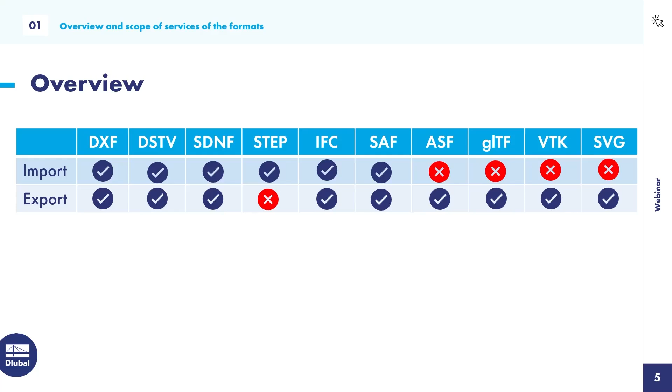We will start with the DXF interface and a brief overview of the import and export possibilities. Concerning the import, we mainly support the import of nodes and lines.

You can also import members from the DXF format. To do so, you have to mention the cross-section and optionally the material name inside the layer, and then we can read this information and automatically create members.

We can also import surfaces from AutoCAD, however only if the object is a 3D face element.

Concerning the export capabilities, here we mainly export nodes and lines. So members with the graphical rendering in Rfem will be exported as a simple line, not as a 3D rendered object.

One more information regarding the import. There are two options: we can import the DXF information directly, so you get the lines and nodes and so on, or you import a DXF as a background layer. That is of course also possible.

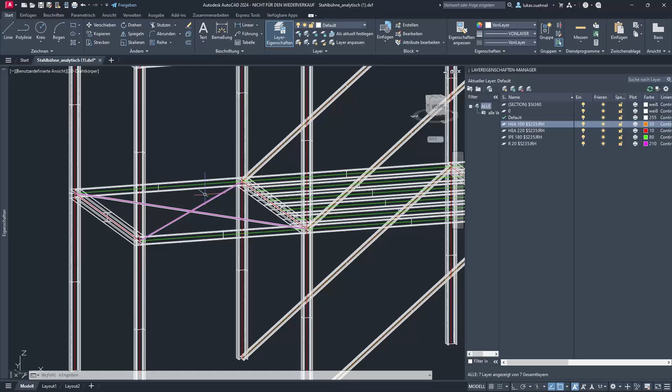Then I can go into Rfem 6, go to File, Import, and use DXF2.

I can select the DXF file, and then I will get a little dialog that allows me to define additional settings.

First of all, I want to rotate the structure because otherwise it would be upside down due to the global coordinate system. I want to generate the members based on the layer names.

I also want to import only selected layers. So in that dialog I already see which layers I have inside that DXF file, and I'm not interested in the default or the specific section layer. I only want to import the center lines, basically.

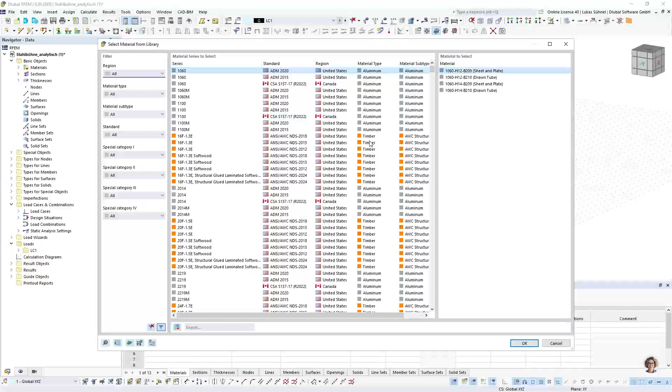Let's take a short moment - the cross-section or conversion tables will open. In case your layer names do not match the cross-section or material name inside Rfem, you can define them in this conversion table, assigning the related Dlubal material or section before importing.

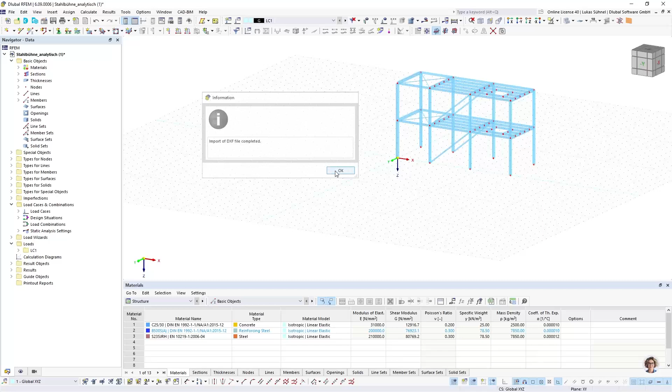Should be filled correctly on my side already, so I just click OK, and now Rfem will lock itself - you can see it on the bottom, everything is grayed out, I can't do anything. This is on purpose: we are using our API to read this data, and while the API is working, you're not allowed to do anything in Rfem, so we are locking the screen.

The import is finished, and you can see the same structure here in Rfem now. We can briefly check the imported data, for example by using a specific display function - I can use colors of rendered objects by object property, member section, for example, and then quickly double check if I have the right sections in my file, so basically if the conversion was set up correctly.

Or you are running additional checks - for example under tools you have a model check for identical nodes. It shows up quite often that in DXF files there are nodes very close to each other, or multiple lines on the same location, and we have these model checks that can help you find these situations. You can set the tolerance for identical nodes to, say, 1 centimeter, and check if in that radius there's more than one node - then you would see those nodes here. It's not the case here, so should be fine.

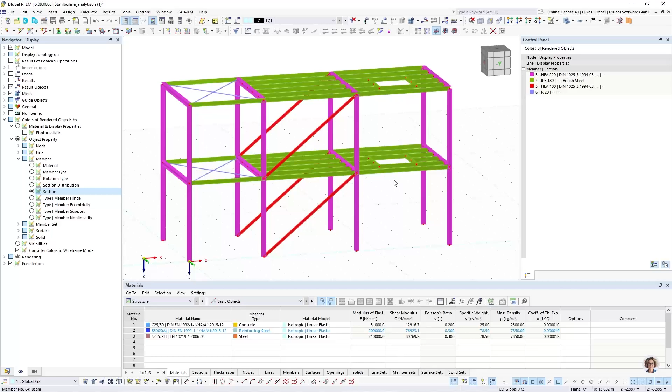With this data - these native objects, members, lines, and nodes - you can continue with the loading, the supporting, adjusting the structural model in general, of course. That is the DXF import. And now I also want to show you the export.

So let's open another file - I have them prepared, of course. That is a membrane structure, a little tent basically. Let me show that quickly.

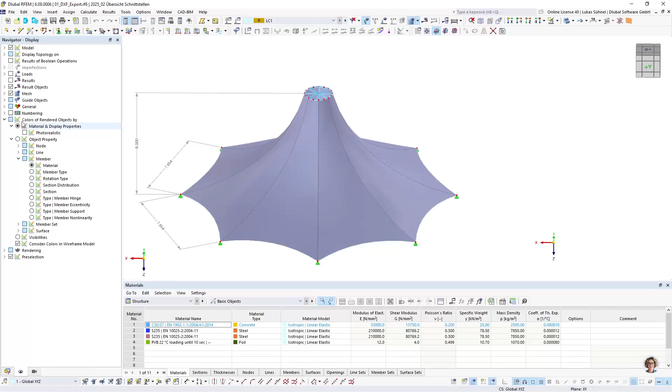Here already with the results, but I can turn them off. Just some brief information: in Rfem 6, you're able to run form finding calculations. Therefore we have this specific add-on, form finding, that allows you to model these membrane structures as we have here. You can support these membranes on the bottom, for example via a cable, and on top wire this supporting circle of beams.

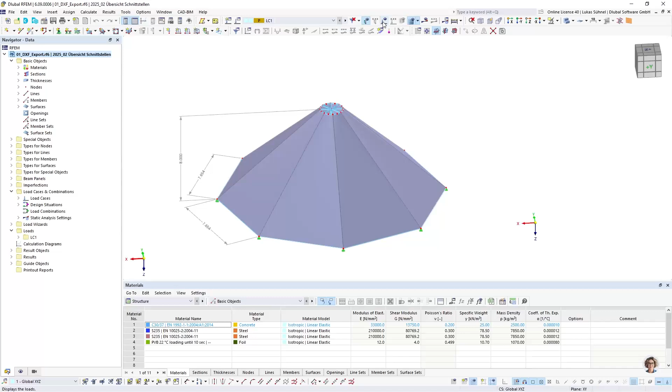Then you need a pre-stress load case, and inside the pre-stress load case you can define the target force, the target stress, or the target sag of membranes and cables, which has been done here. Then you can run the form finding, and Rfem will calculate the required shape that is required to fulfill these loads, these predefined loads.

Now that is the result, and it is quite common to export these structures into AutoCAD for additional drawings and so on. So we developed not only the DXF export, we also included options to export the deformed shape.

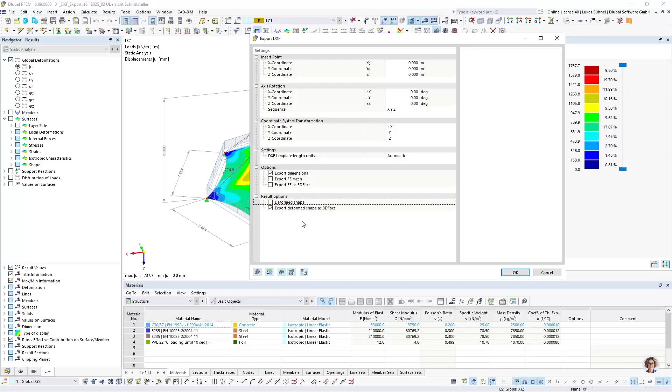Put it on my desktop, and I have here various options for the export. I can export dimensions, I can export the original FE mesh - the FE mesh we create before the form finding analysis, which I can export, but I'm not interested in that. I can also export the deformed shape, or actually I'm just looking for the deformed shape as a 3D face, which helps me with the rendering. So these are the settings.

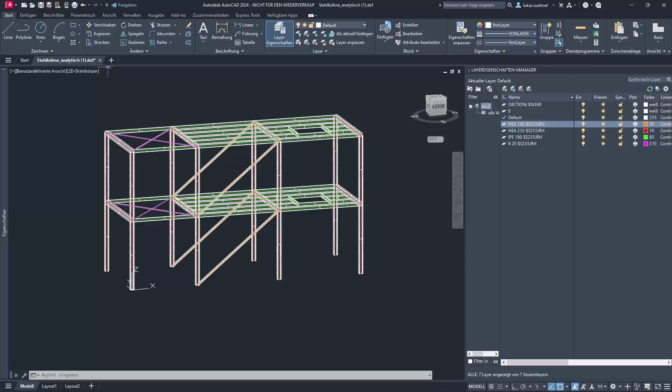I press OK - Rfem should be locked again in a second, because we're again using our API. Yep, happening now. And as soon as it's finished, it will unlock and give us a message that export is done. Now I can go back into AutoCAD, maybe close this file here, and then open the deformed shape DXF.

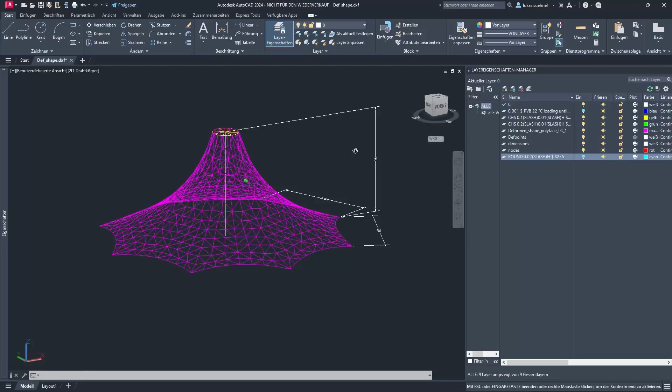Let's zoom in - so that is the result. Now I can hide a couple of layers I'm not interested in, like these cables on the bottom, and display the deformed shape using a different rendering setting for a nicer graphic. We can also see the dimension lines - it's not just simple lines, it's a real dimension line where I can change the settings and so on.

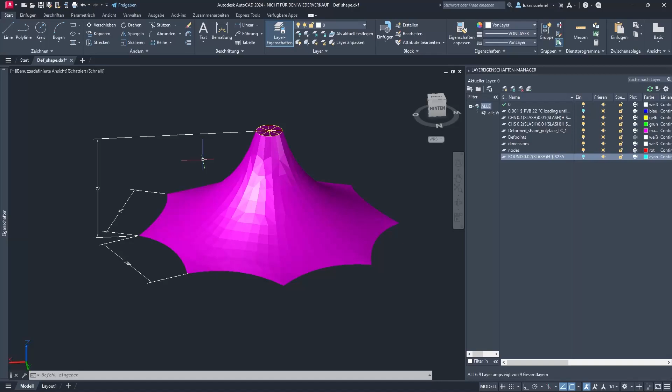All right, so far regarding the DXF interface. Let's already go to the next one - the DSTV interface.

The DSTV file format was developed and introduced by the German Steel Construction Association. I have a product description from 2000, so it's a rather old file format, but it has many strengths when it comes to exchanging pure beam structures. It contains relevant information such as cross sections and materials for the members, but also supports hinges, eccentricities, member types, set of members, member elastic foundations, and concerning the loading, the typical nodal loads, member loads, imperfections, and of course load cases and combinations.

Due to these diverse options and the simple definition inside the format, which I will show later, it can be found in many programs. So many steel detailing programs, but also other programs, offer an import and export into the DSTV file format.

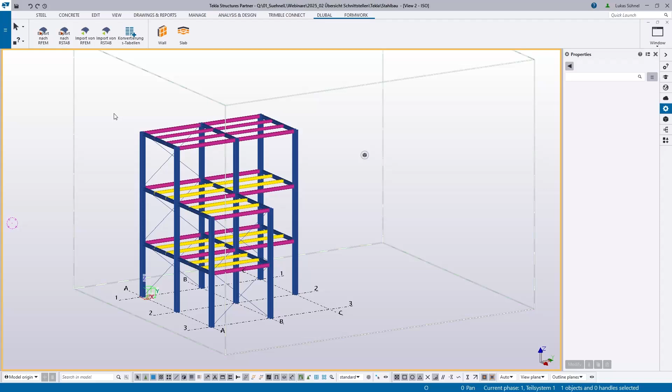So you need to have Tekla and RFEM on the same PC. That is not always the case, and then a file format for the data exchange would be quite handy. We have that for Tekla, and I want to show how you can do it.

So first of all, you select those objects that you want to export. Then you can open this menu, go to export, and now, not so well known I would say, is the FEM export. Here you find the DSTV file format.

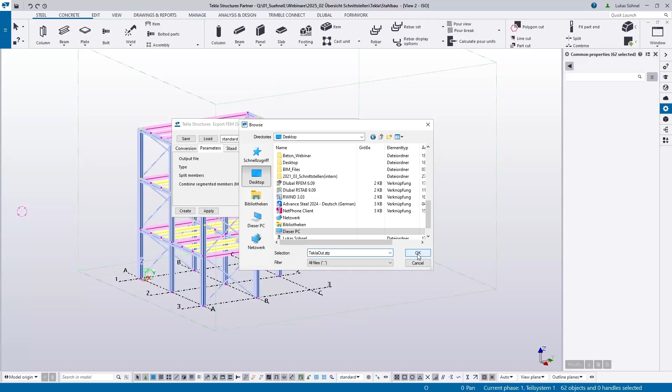You can select the output file location under the parameters tab, so I put it on my desktop, Tekla out. Little hint: add the .stp description here, then it's easier to find in RFEM 6 when we are importing it. Press OK, then click on apply and create, and the export should be done.

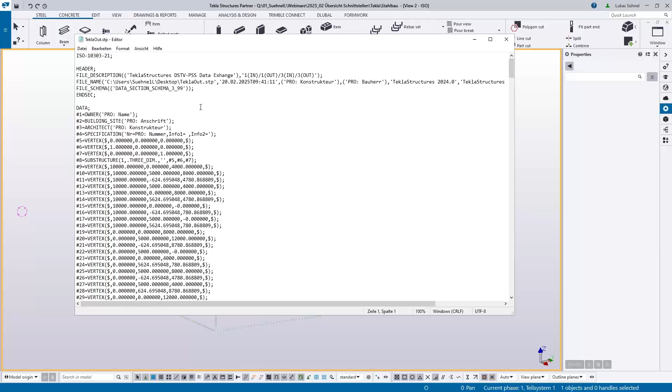Let's have a brief look, I will open the file. This is how the file format looks like. You can simply open that STP file with the editor, and you can see the program it originates from, maybe even the person who created it, and the version of the program.

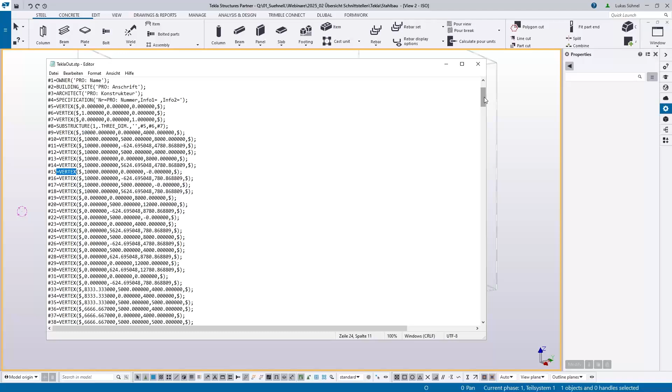Then you get a long list of nodes, so vertex is basically the node, with coordinates. Then we have the material, we have the cross sections. Here the focus is usually on the name, because we are converting the names anyway - it's not about importing the cross-section values or something like that, which can also be documented in here.

Theoretically Tekla doesn't do it. After materials and cross-sections we have these elements, which are basically the beams - the member type, start and end node, the cross-section at this member start, cross-section at member end. So it's possible to exchange also tapered members.

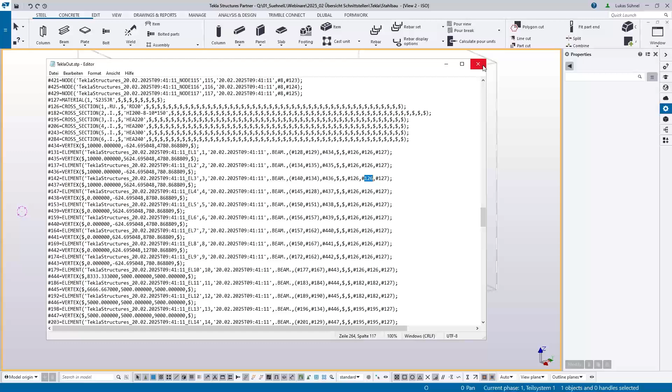Further down there can be more information about loading and hinges and so on, which is not the case here. All right, so let's import that file into RFEM 6. I'm closing this membrane structure. File, import, DSTV.

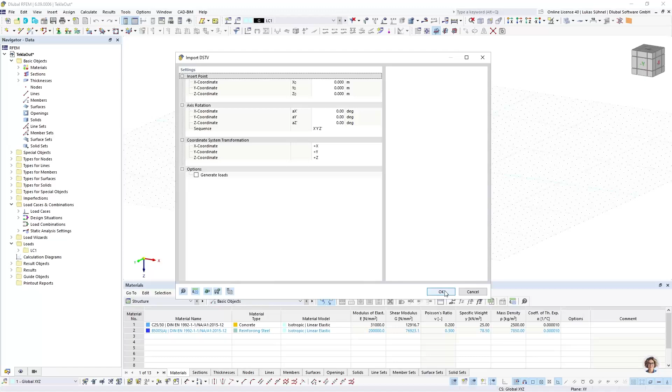Desktop, just navigating into my folder, Tekla out. Okay. RFEM will be locked again after I define, or after I press OK in that screen. So I could import the loads, but there are no loads inside, so I leave this toggle unchecked.

Then again, conversion tables to match the section names - I did that already. I can press OK, and the import will start. All right, so import finished.

We have a couple of free nodes which have no use in that moment. I can get rid of them by going to the edit menu, select, and then we have an option free nodes. Then all of these free nodes will be selected, and I just hit the delete button on the keyboard and they are gone.

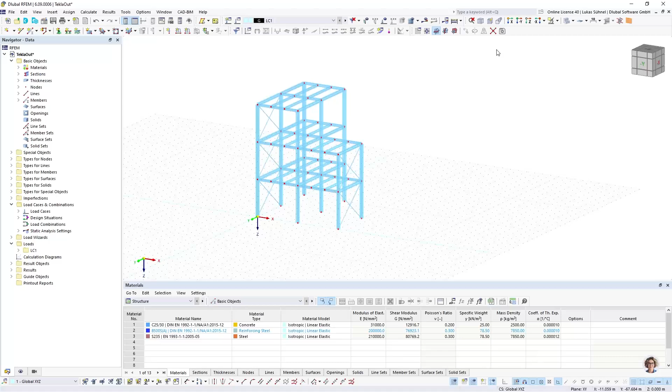And now you can see we have the same structure as we had in Tekla. Again, I could double check the content by using some rendering functions for the cross sections or member types. Here I can see it's just member type beam, and if I select the member hinges, there are no hinges assigned.

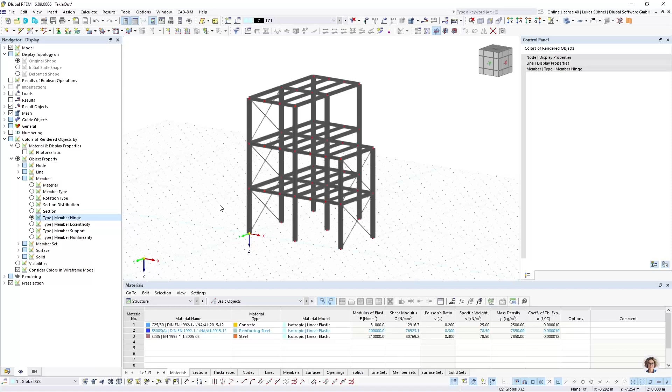So I got a model from Tekla where every beam is connected rigidly to the next beam. That is not ideal. In RFEM, I would continue now with adaptations concerning this analytical model.

This can be done rather quickly. I have these synchronized selection options in RFEM. If I click in the data navigator onto a specific cross-section, all members with that cross-section will be highlighted, so there's no need for me to manually draw little windows. Just select the cross-section and double click on these members to change the member type to tension member.

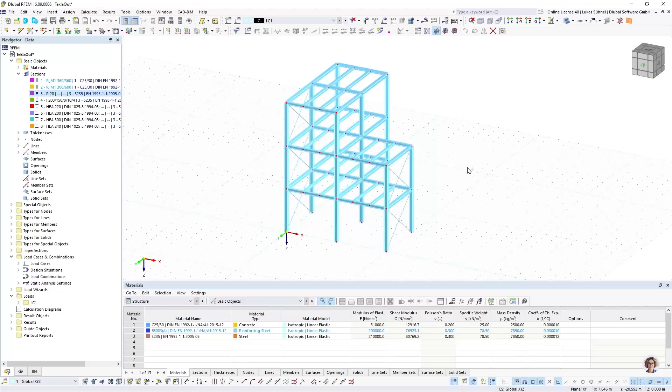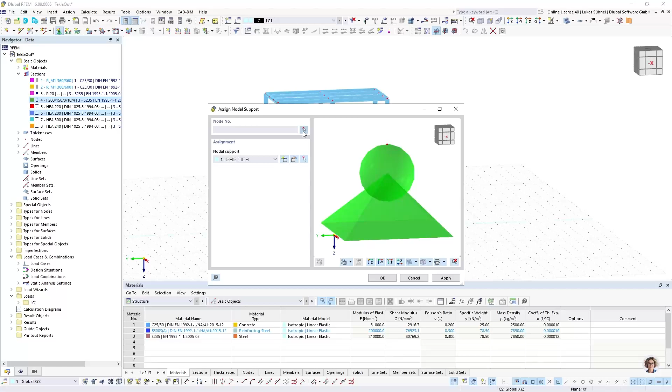The same could be done for some of these smaller beams or horizontal beams. I'm selecting these cross-sections, double clicking, and defining the member type as truss, which means it is a member with hinges for the bending moments at the end. I could assign supports and so on, all the things that are required.

And then I can assign loads and so on. And of course I can also export this file again into the DSTV format. File, export, I put it again on the desktop. RFEM out.

Okay, again takes a little moment. All right, RFEM out, I can open it with the editor.

We have, of course, in general the same information inside here, but we sort it a little bit differently. We have chapters: coordinate system, nodes, cross sections, materials, and again the members. You can see now we have tension members, truss members, and beam members, so there is definitely modification visible.

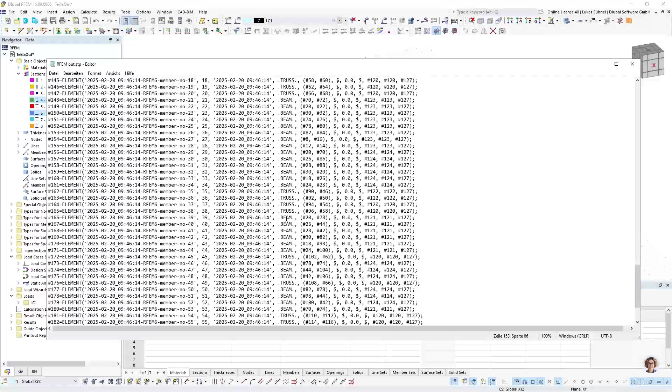And this file then can of course be imported into any of these other mentioned programs.

All right, let's go to the next file format, the SDNF format. The name should be steel detailing neutral format, so a neutral format for steel detailing. It was developed by Intergraph for the purpose of exchange between structural analysis programs and the steel detailing programs.

I think you can also see under additional programs that it is mainly used in these steel detailing programs: Advance Steel, HiCAD, Tekla Structures, Aveva E3D, and so on. It can be used for the transfer of beam structures, so materials, cross sections, uniform members, not tapered members, and eccentricities, but it also supports surfaces including openings, at least on our side.

The format has more capabilities, for example connection details, curved elements, and loads, which are currently not supported in our export or import.

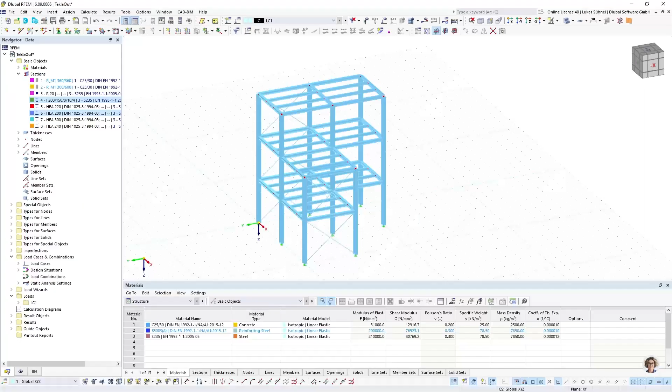Yes, let me also give you a brief demonstration of that format. I will close this file and open another one, which is this one. It's like a cantilever truss structure, if you want to call it that way.

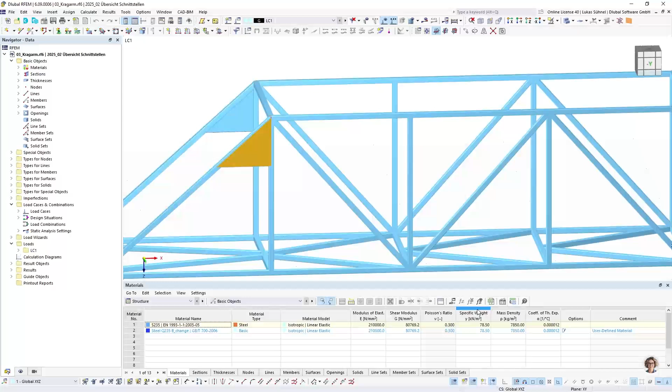So mainly beams, but also some surfaces here, 8mm thickness, to get a more rigid steel joint in that area. And then here at the end, also a surface with an opening. That is maybe the structure that we want to give to the steel detailing person to save a little bit of time with the modeling. And we can do that.

My plan is to import it into Advance Steel, and for Advance Steel, the ideal format from our side is the SDNF format. So I go to File, Export, SDNF. Under the desktop I will save this, however we want to call it. I want to export linear members, surfaces, and openings. I press OK, and while the export is running I will look for Advance Steel on my PC.

Yep, all right, so let me call up Advance Steel. I can use this menu for importing files.

Here, however, I won't find the SDNF format. You can find it under the Export and Import menu or tab, and then here you have additional formats: IFC, CIS/2, SDNF, which we are going to use, but also the DSTV format and others. So I will select reading of the SDNF file, and then I can see here the one that I just exported. I press OK here.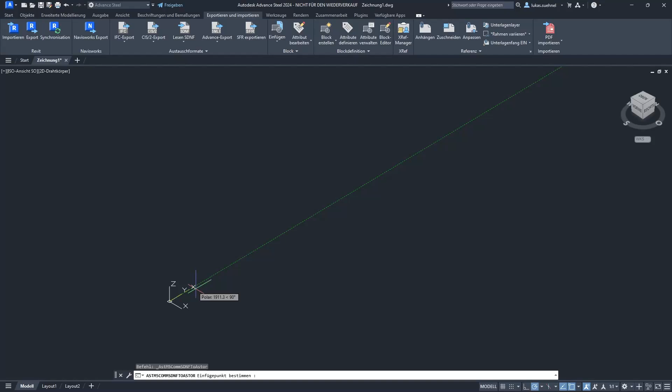Let's see, sometimes we have to do a cross-section conversion similar to our program. The Advance Steel is reading the cross-section names from the SDNF file, and if it doesn't know what Advance Steel cross-section should be assigned or used, then you have to assign it manually. I did that for the German webinar already, so the window didn't pop up here, but we have the cross-sections, which is the most important part.

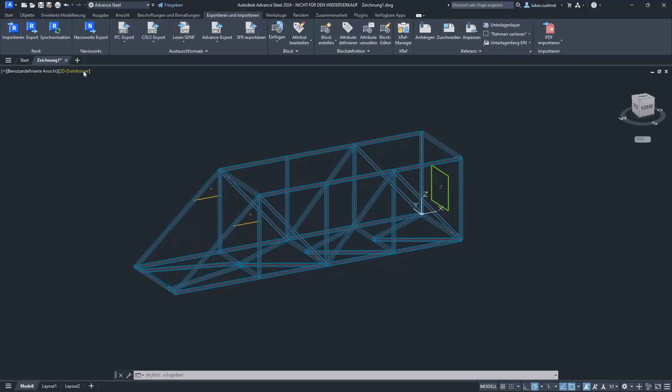And now let me change the rendering a bit, and we can clearly see that the import was successful. I get the same structure, and it's not just graphical objects—we can also see the information here. So thickness 8 mm, I can display the cross-section.

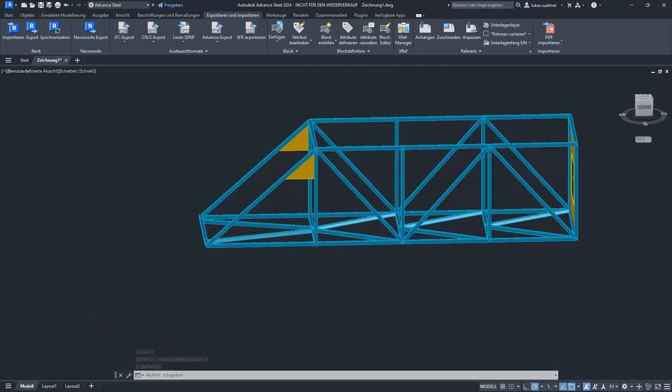Hollow cross-section 40/3. So we got the information that we need, and now we can continue in Advance Steel and assign, for example, the connections. This could be done via advanced modeling, and then I have here a connection manager, which shows up on the wrong side. And for example, I want to have a connection in that area.

So I could select here, let's say fin plate with 3 connected diagonals. So I select the main beam, then the first diagonal, second diagonal, third diagonal.

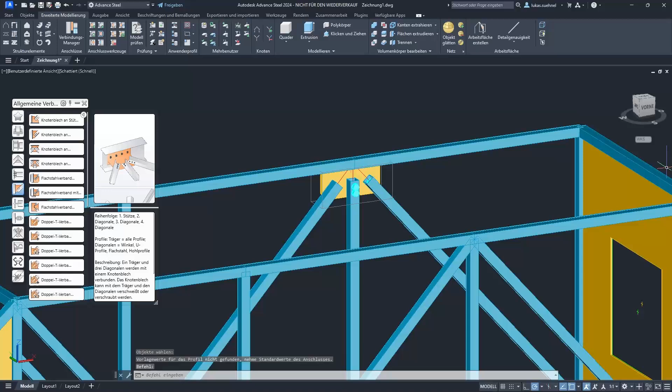Then I will get a preview of my connection. I can rotate it a bit, and modify it further in the other dialog that shows up. For example, I could modify the fin plate, or where is it, the amount of screws, the diameter, so maybe diameter 12, just 1 screw or bolt. And when I'm done, I can close it and I have my connection here.

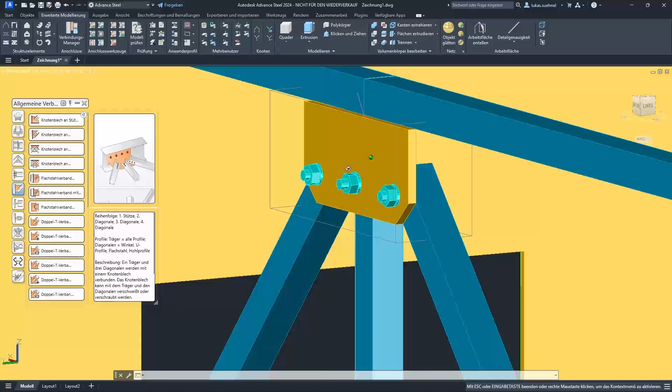So it's clearly visible, even though we exported based on the center lines of the beams, which we can see here, that is not an issue in Advance Steel. It doesn't matter, it will cut or shorten the members according to, for example, the steel joint that we define in here. So it's definitely usable.

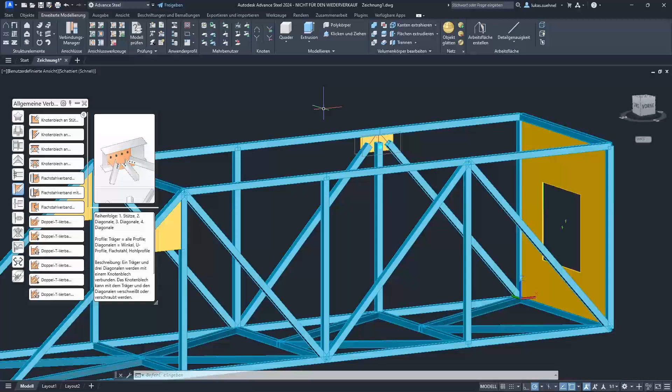Okay, so far regarding the SDNF format. Let's have a look at the next one. The next one is the step file format. We support only the import of that format, not the export currently. And concerning the import, we are reading nodes, lines, surfaces, and solids.

It is a format mainly for the use of, mainly for exchanging solid structures, 3D objects. Cross-section materials and members is not exactly the purpose of that format. You also see that when you check which programs offer step imports and exports, usually it's common or general CAD programs, or CAD programs with a mechanical engineering background, SolidWorks, Inventor, CATIA, Siemens NX, Rhino.

And again, it is for the exchange of solid models. Usually when you model something in, for example, Inventor, even though it's maybe a 3D hull where you think of beams, cross-sections, IPEs, and so on, when you export it into the step format, you get solids for every member. And therefore, I think the use case is not so much for beam structures or typical buildings.

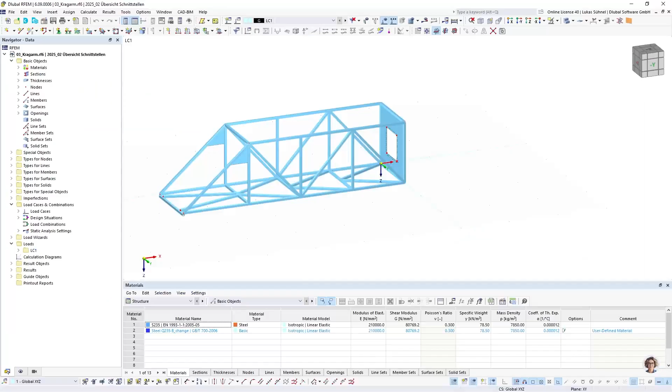And I want to show it, of course. So I go back into RFEM 6, and I'm going to import the structure that we just saw on the PowerPoint. So I will open here the step import and go into my folders and run it. Maybe while it's running, one more information that I should mention, because it is a common question.

There are two formats with the same ending. The step format, which is for the exchange of solid models, STP, sometimes even STEP. And we have the DSTV interface also with .stp. This, however, as I said, is mainly for beam structures. So they couldn't be more different, beam structures versus solid models.

Sadly, they use the same file format ending, which is causing confusion, because often we have customers reporting that the step import isn't working, but then they got a DSTV file or the other way around. So make sure to check out which file format really has been exported from another software, and then use the proper import in RFEM. The good thing is you can also open these step file formats. It's the same logic, you can use the editor to open them, and then you somehow see, is it a DSTV file or is it a step format?

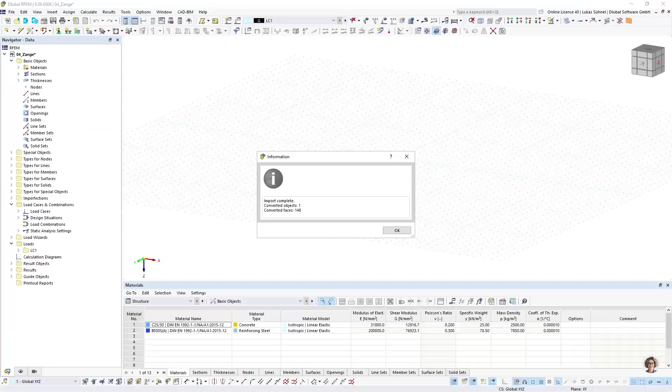All right, concerning RFEM 6, the import is done. We can see the structure here. Let's change the rendering, I should have rotated it before, but doesn't matter. We got the solids from the step file into RFEM 6.

We can see it also here. There are no members, but we have a list of solids currently displayed in red color, which usually means something is not correct.

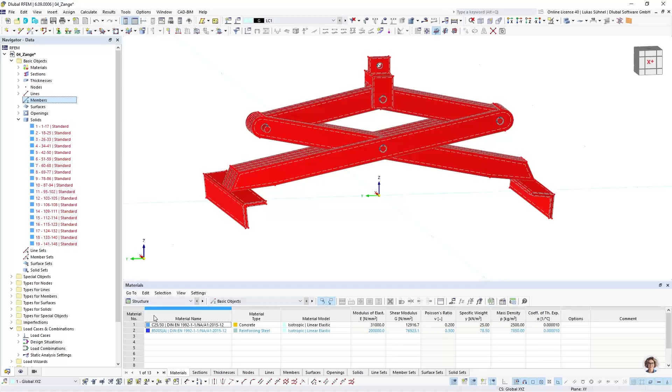We can check it. We can just select one of the solids, double click, and we can see directly the material is missing. As I mentioned, materials won't be imported on our end, but it's of course easy to assign a material. Let me use an S235. And with that information, the solid is valid.

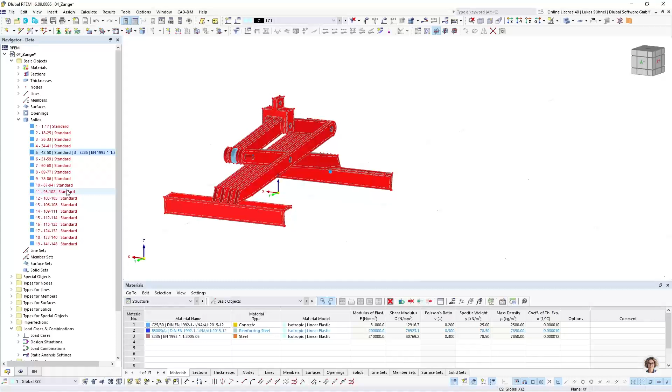I can do it for another one. Just a second, this one, for example.

Edit, and then I assign the material. I can, of course, use multi-selection and do it for all of them. For today, two solids should be enough, because I want to show how you can use the step file.

Now let's display these two solids. Selecting them again in the navigator, and then just these objects and related objects. I can hide the other information in the background, and we can see we have the solid from the step file here, and in theory it is a valid solid.

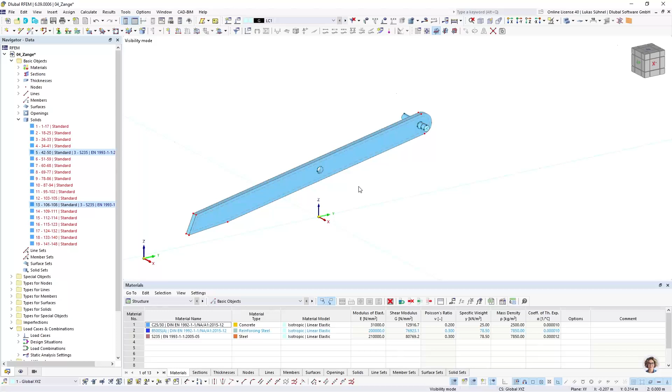The question is, however, if you first of all want to design this structure as a solid structure, or if you want to simplify it into maybe surfaces or beams. And if you would decide to use solids, you still have to manipulate the structure. For example, in that area, of course, we have the bolt here, and we have the solid, but there is no information about how the forces should be transferred from the bolt to the metal plate, basically.

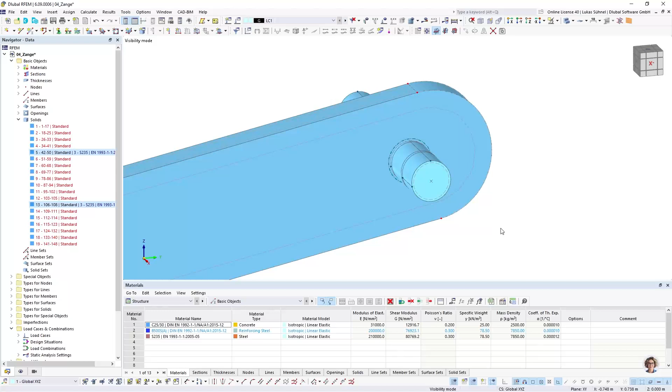Here we would use surface releases or contact solids. So usually, like in 99% of the cases, you have to do manual adjustments after a step import. Okay, in my case, I would not use solids.

I think a surface and a beam structure would be fully okay, or would be enough. I want to simplify it. And how can I simplify such a structure here? Here I have a plane. Let's say a plane solid.

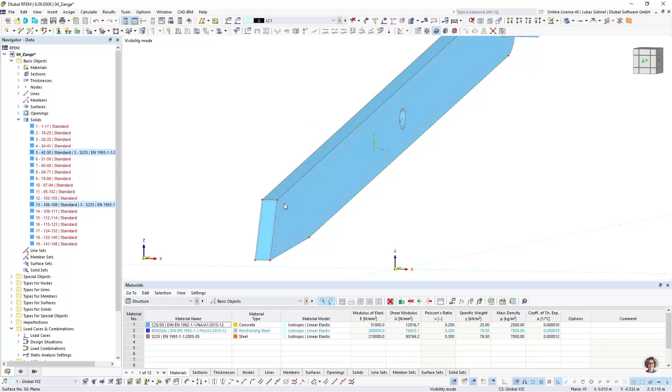So I can easily select one of the faces, go to Edit, select Related Objects. Then it will also select the openings and everything that is related to that surface. And I can use the drag and drop functionality. So I just keep my mouse pressed, hold the control button pressed on the keyboard, and then I can create copies of that object that I selected.

And I will place it in the center, for which I have a snap point. And then I have this additional surface. That's all I need for that object. So I can select the solid here in the navigator and say delete with boundary surfaces. And then only the surface is remaining.

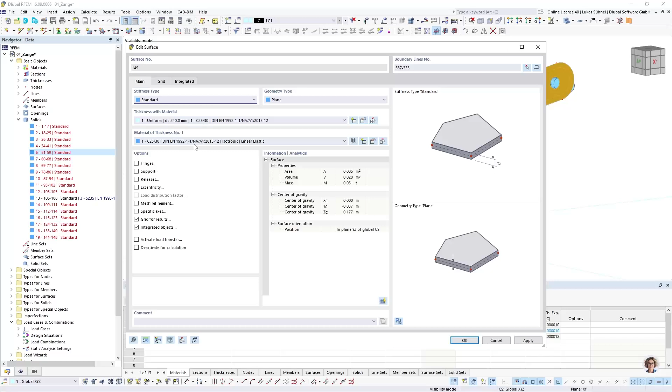I can assign thickness and a material. For now, I don't care how thick it is and so on. But I could define it in here. And then it's, of course, a valid surface.

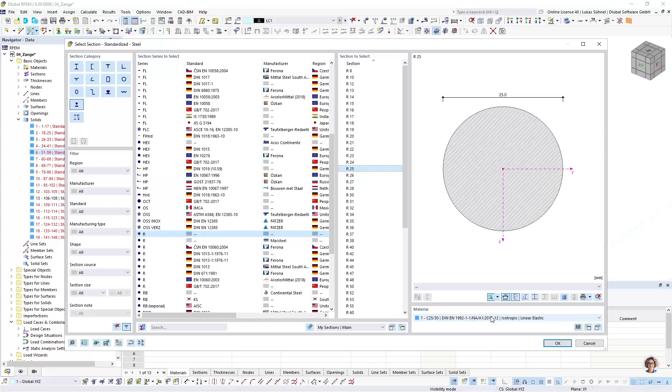Same for this bolt. I don't want to use a solid here. I want to use a beam. So I go into my library, select an R25, which is the diameter of that bolt, R25, with the related material.

And I am catching here the snap point, the center of a circle. That's the snap point I can select. Same on the other side. Then I have here a member, and I can delete this solid.

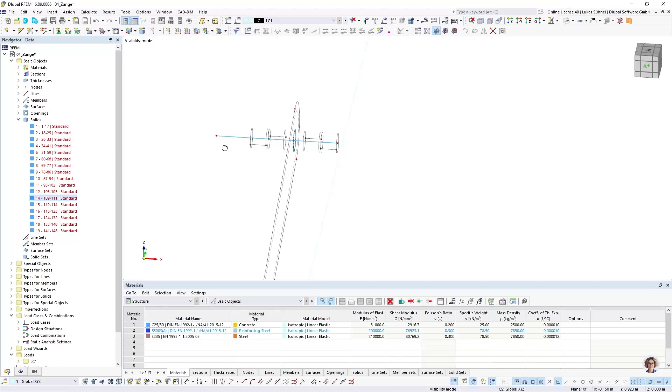With its boundary lines. And then we can change the rendering. There are some lines remaining. I can simply delete them. And I have my simplified.

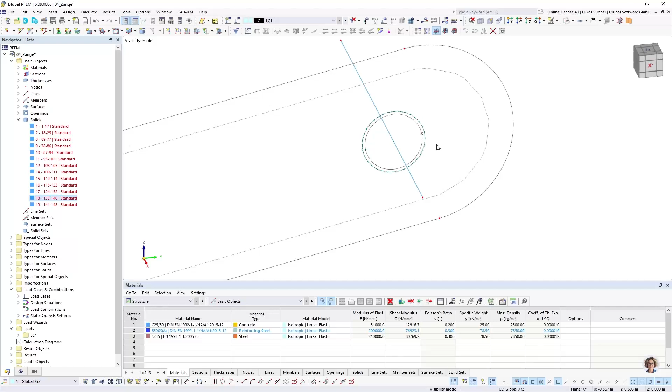Surface and beam structure. And concerning the connection between this bolt and this metal sheet, I would use maybe like a web of members of beams or coupling members to create a proper force transfer. Yeah, this would be my simplified approach for that model.

Let's display everything again, and you can easily copy this surface to the other two sides. Do the same steps for the rest of the structure, and I think it is a valid use case, the step import.

All right, yes, so far regarding this interface. Let's switch to the next one, which is the IFC format. It's the format for the construction world, civil engineering world.

We support the import and the export, of course. Concerning the import, we are able to import the IFC files from versions IFC 2x3 or IFC 4. We can import the structural analysis view and the reference view, which is not so well known. Usually people or customers only know that there is the IFC format, but it's not so well known that it has different views, or let's call them subformats.

What is quite common is the reference view. This is what you usually connect with the IFC format, architectural representation of objects. So every object is a 3D solid, basically. We can import that, of course.

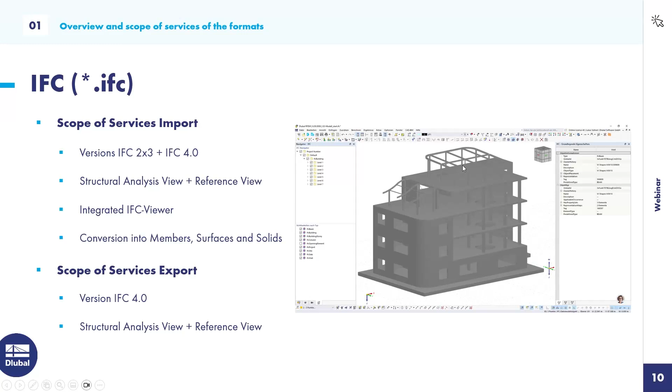I won't show it live now, first of all due to the time, but second also because I already gave a webinar about this topic. So more details about this can be found in that webinar.

So the next interface is the SAF interface, the structural analysis format interface, developed by Nemetschek in cooperation with other structural programs. It is a file format for the exchange of the analytical model. We support both the import and the export.

Here we support version 1.0.5, which is not the latest one. We are aware of that. I'm quite sure we will run an update of the interface to the current version 2.2.

Nonetheless, you can use it to import and export model data such as members, surfaces, supports, hinges, eccentricities, but also load cases and loads, node loads, member loads, surface loads. It is similar to the IFC structural analysis view.

The main purpose of that format, as I said, is the exchange of the analytical model. So it could be a use case between the structural engineer and the checking engineer, which is quite common here in Germany, like a second instance checking the structural calculations. That could be a use case.

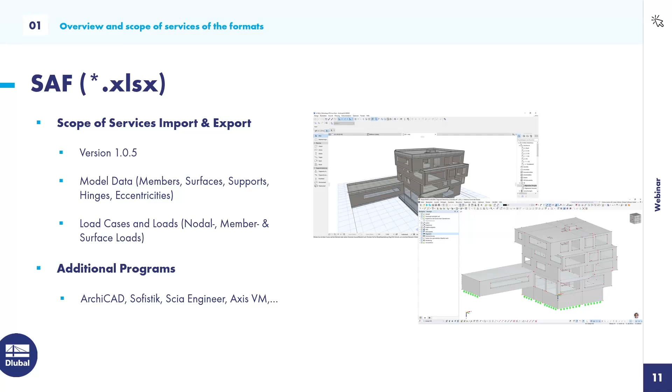Okay, the next format is the ASF format. So we kind of remain in the Nemetschek world and Allplan world. It was, or it is, a format especially for the data exchange of reinforcements, mainly for Allplan, but I think also other concrete detailing programs support the ASF import.

So what is the scope of services here? We can export our surfaces and the required, provided, or not covered surface reinforcements into the ASF file. Then you can read that ASF file in, for example, Allplan. There you get, let's say, dynamic graphics.

You can see here these are basically the required reinforcements on the top or bottom side of the surface, and the colors represent different required AS values. Now you can define the reinforcements, for example a mesh reinforcement inside that surface, and these graphics will then show the remaining or not covered reinforcements. So you can graphically see where something is missing, where you have to add additional rebars. That is the use case.

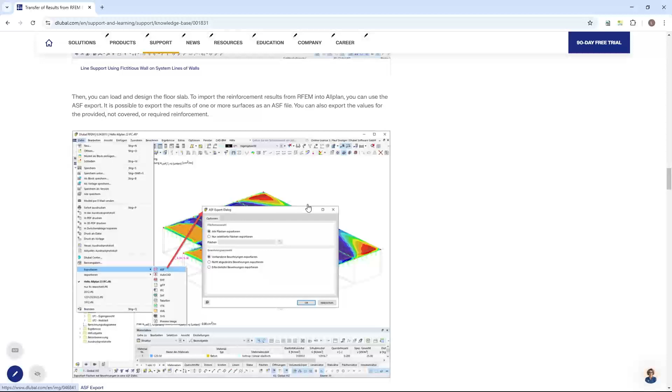This use case has also been described in a knowledge base article by my colleague Paul Sivolgin. He wrote about the transfer of results from RFEM 6 to Allplan using ASF files. Quite a nice article, feel free to read it. It contains the most important information, the dialogues, and how you can import it into Allplan. So I won't show it live, I think there's a good article on the website.

Now let's come to the last three file formats that we have: the GLTF, the VTK, and the SVG. All three file formats are a byproduct of our own development. We are using them mostly internally for other use cases, but since we are creating them internally, we thought, why not offer them also as an export option inside RFEM 6? I wanted to give you a brief overview of the capabilities of these formats, to see if they have a use case for you.

I want to start with the GLTF file format, which is a file format for the export of the 3D scene. You get a 3D model out of it. You can visualize the model data, loads, results, but also steel joints or the reinforcements that we can display. So you can more or less show anything that you can see in the graphic representation of the RFEM model inside RFEM or RSTAB, and you can display that scene via the Windows Explorer or the 3D viewer.

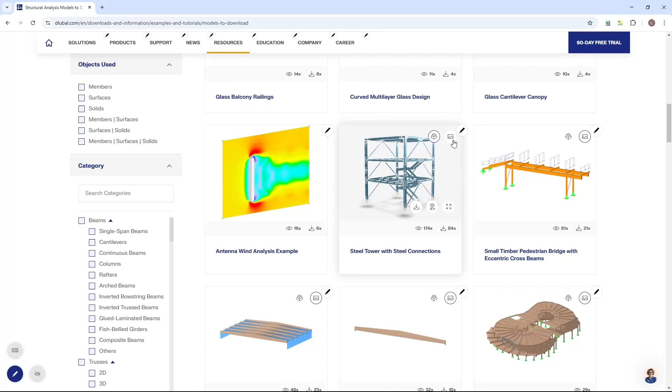In the background, as I said, we're using this GLTF format. We are also using it if you want to display the file in the Windows Explorer. That's how we use it, and we offer now this export also in RFEM 6. I want to show it here.

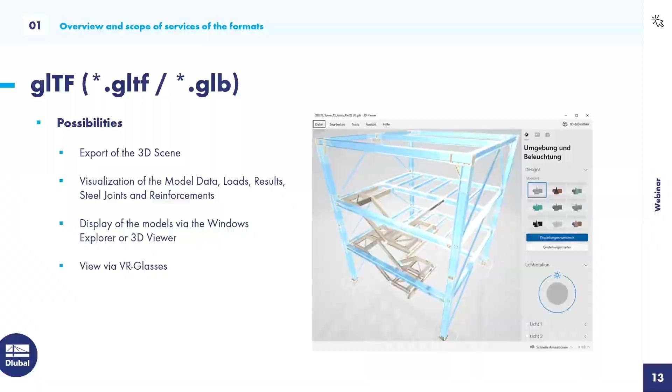Let me close this file and open this file with the steel joints. It's quite a nice file because every connection has been designed with our steel joint add-on. We have a new steel joint add-on here in RFEM 6 that we developed for RFEM 6.

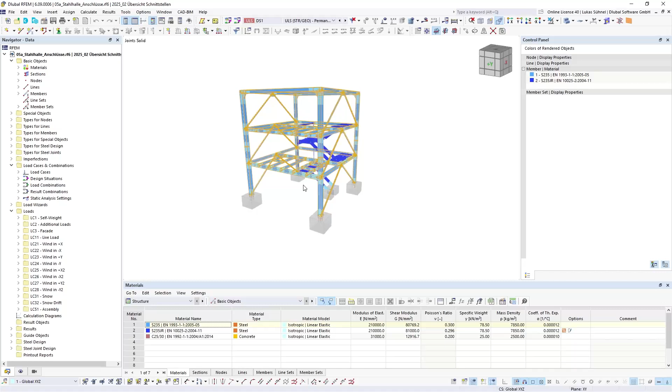The benefits are that it's possible to design 3D joints. There's basically no limit regarding the amount of members connected to a joint. The members can come from any direction, and it's also not limited to specific internal forces, so any force that you have in the internal beams can be considered. This is the new steel joint add-on, and you can see here every joint has been designed somehow. That's quite a nice graphical representation that we have here.

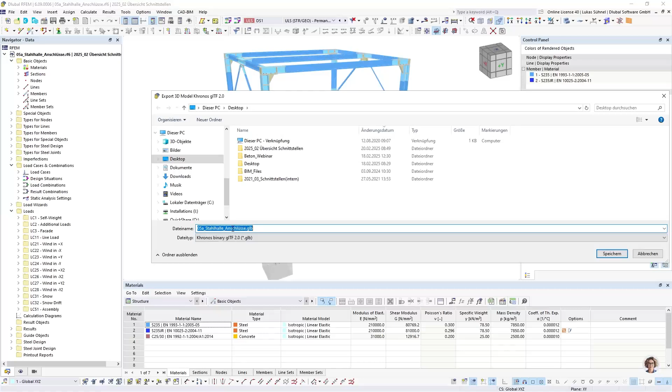The use case of the GLTF format could be that you want to present your work to the owner of the building, and for that you might want a nice graphic. This can be created via the file export in GLTF. So I save it on my desktop, press save, and then I can open it.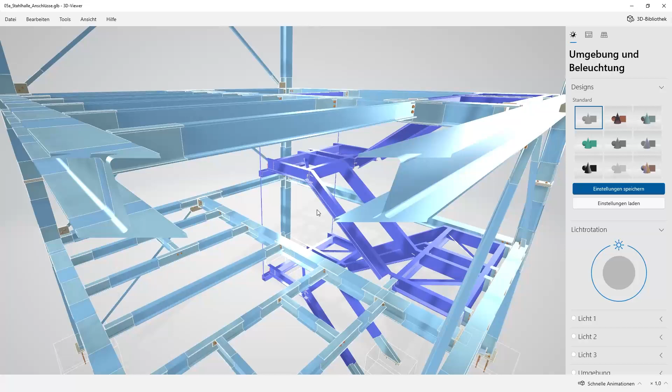I'm opening it via this 3D viewer, which should be a default program when you have Windows on your PC. You can see already that you can rotate through the structure and zoom in. It's quite nice to navigate through the structure. What you do not get is additional information—it's not, as far as I know, possible to click on objects and read the properties. It's really only for the graphical representation, for viewing a structure.

Okay, so far regarding this file format. We also have an export into the VTK file format.

The VTK file format, or this export, how we implement it, is kind of a container for simplified model data and results. Mostly for the results, and we are using it for the communication between our RWIND program and OpenFOAM. RWIND is our standalone program, which can also be integrated into RFEM 6. It's like a virtual wind tunnel, so you can calculate the wind pressure and suction on complicated structures and shapes by that. This analysis is done via OpenFoam, which is a numerical solver for fluid mechanic analysis.

You can see or display these results that we are exporting with the Paraview viewer, and this is what I want to show here. Let me open again a file—this concrete building, for example.

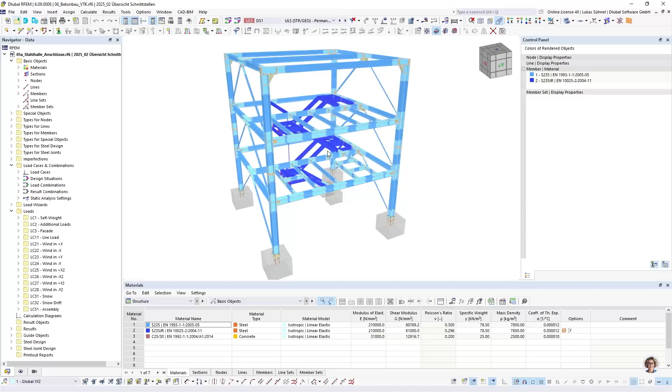For that office building, I calculated the results. So I have here the full range of results: deformation, member forces, internal forces. I also have surface results: stresses, forces, deformations, all these kinds of things. And all these results can be exported into this VTK file format.

So you just click on File, Export, VTK. Let's name it Results, save it on the desktop. Will take a short moment. And then you get on your desktop this results.vtm file, which is linked to this results folder with additional files. You can open the VTM file with ParaView.

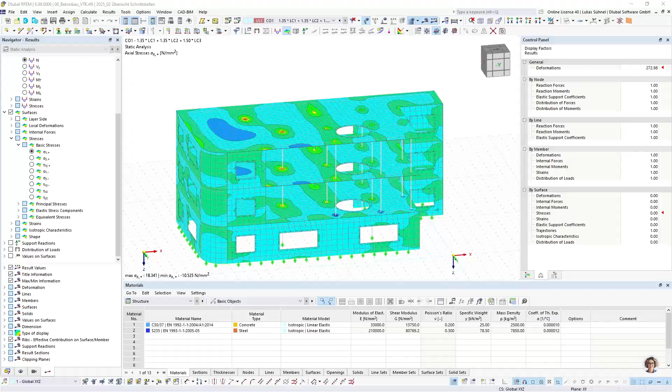Let me show that as well. It's a freeware, you can download it. Just Google ParaView and download it, and then you can open the results.vtm file. You can open a lot of files with it. It's quite a good viewer. Now I'm interested in that file.

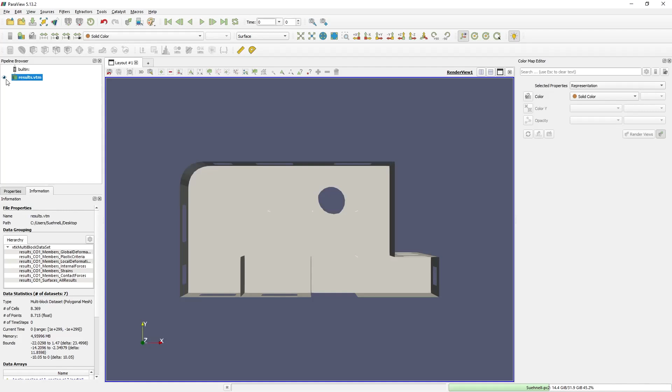Press OK, then I activate my file, and you can rotate it. You see it's like a simplified representation of the surfaces and the beams, or the columns in that case. The good feature here is that you can select the results that you want to see, and you get them in a graphical representation.

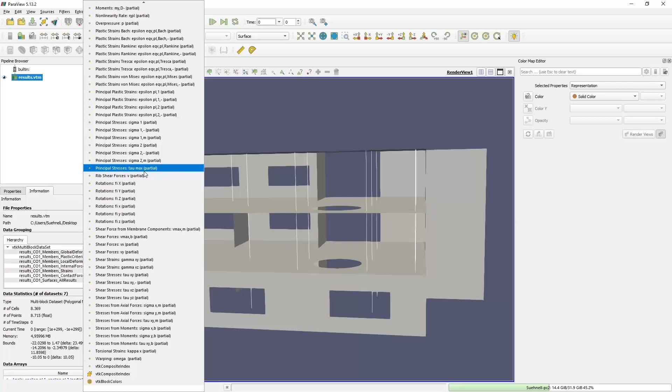So for example, interesting could be the displacements, the global displacements. And then you get this rendering. You could change colors and so on. But in general, you can display these results here, and we can double check it with results in RFEM.

So let's display here the deformation as well. You can see mostly in these areas we have the biggest deformations, and at the front border of these slabs. The same result we can see here.

So what's the use case of that file format? I could imagine that in case you want to display the RFEM results in your own program, for some reason, you have in my opinion two options. You can use our API to read the results that you want to import into your own program, or you're using this VTK file format to export the results into that basically result container, and then read it from that file into your program. That is the use case I can think of.

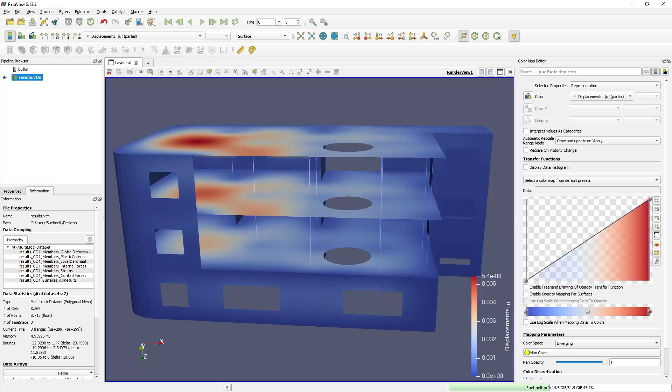Okay, and now concerning the last file format, the SVG file format. It is a format for the visualization of 2D graphics. So it's a simple 2D graphic that you get out of this export. It is a vector-based graphic, so the good feature here is that you can scale your graphic without having a loss of quality of the picture.

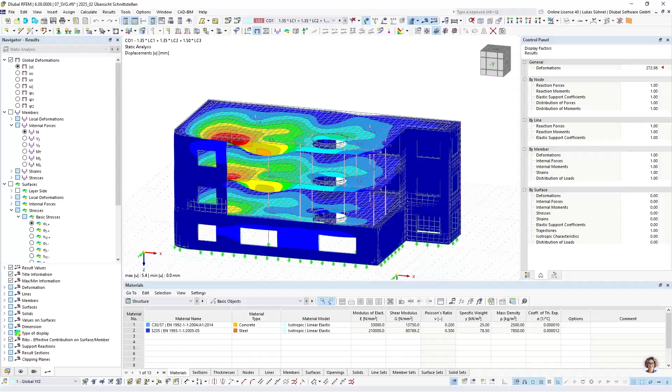I can also briefly show that. So I will open another file again, for example another concrete building. And inside that file, I have the rebars, the mesh reinforcement. Let's see, we can activate here the rebars, for example it's for the members, but I think I also have some for the surfaces.

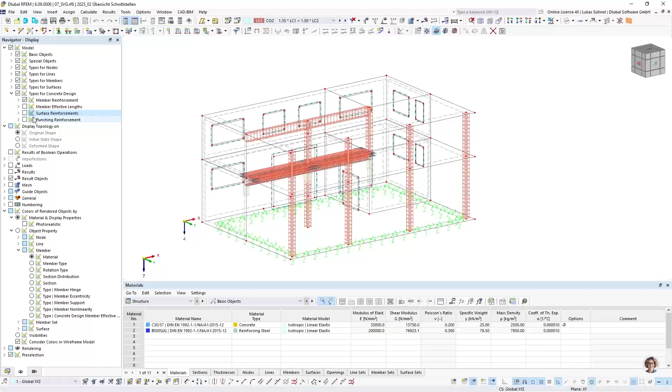Well, just partially. Let's say that is a graphic that you want to share. Maybe you want to activate also additional information, for example if we want to display the top and bottom reinforcements of these members or columns, or maybe even this information about the stirrups, 12 diameter 10 every 30 centimeter.

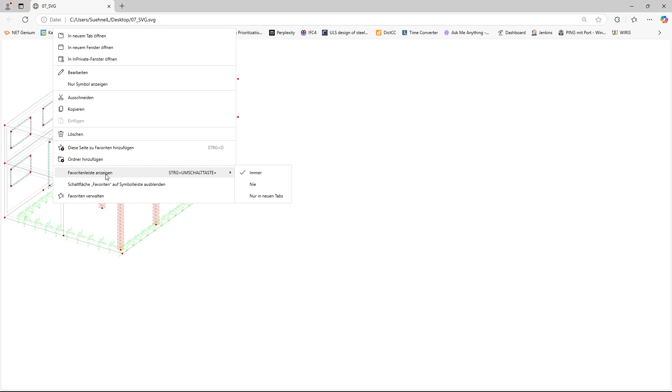So these are graphics you can create here in RFEM in the main window, and then you can export it into that, for example, SVG file format under File, Export, SVG, desktop. The name is okay, and you can open these files with your browser basically. Just double click on the file, and of course you can scale it, increase the size, and the quality remains really good.

So that is the benefit of this file format. I personally don't have a real use case. Maybe if you have a nice graphic in RFEM that you want to scale for some reason for a presentation, it could be used. That's all I can think of.